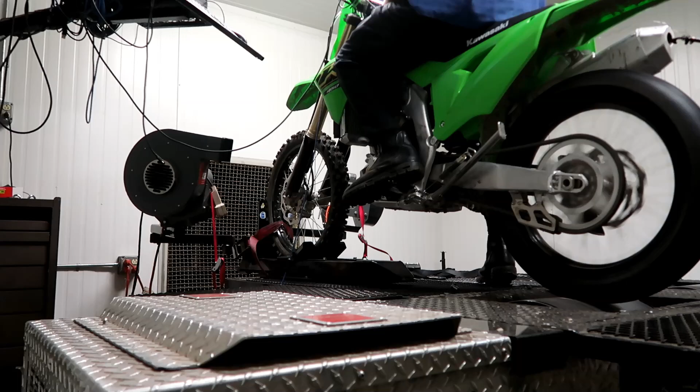Big question: is it detuned in comparison to the KX450?

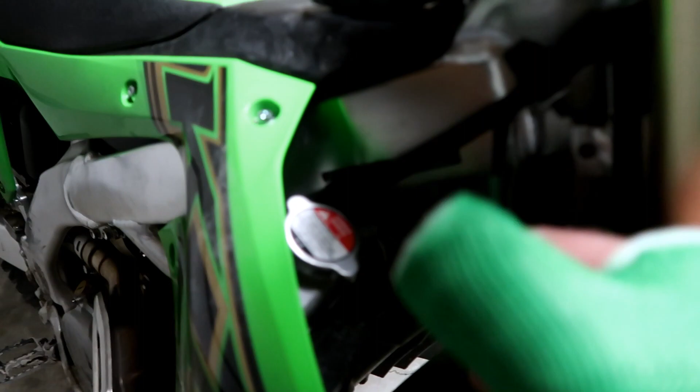As you saw in the title and thumbnail, we are putting this 2021 KX450X on the dyno. The bike is bone stock, as you can see. It has the stock exhaust, and we are running the black DFI coupler, as you can see right here.

So there's a couple reasons why I am putting the KX here on the dyno. One is because I want to get a good baseline for when I start to mod this thing. I want to be able to see if putting an aftermarket exhaust on will help out the power at all. And then 2, when the KX450X came out, people thought that the engine might be detuned compared to the regular KX450, and I kind of want to bust that myth there, see if it really is detuned at all. But apparently it is the same motor as the KX450, so when you look at it that way, there shouldn't be much of a difference. But then again, if there are any differences, it probably is in the tune.

So without further ado, let's go ahead and load up the bike, get to the shop, and get this thing on the dyno. Okay, we're on the way to the dyno. Curious to see what kind of power the KX makes here. Leave a comment down below and guess how much power you think it's gonna make. But I'll see you guys when we get to the shop.

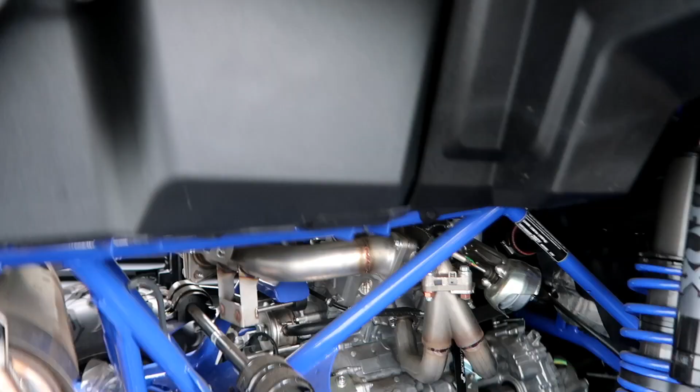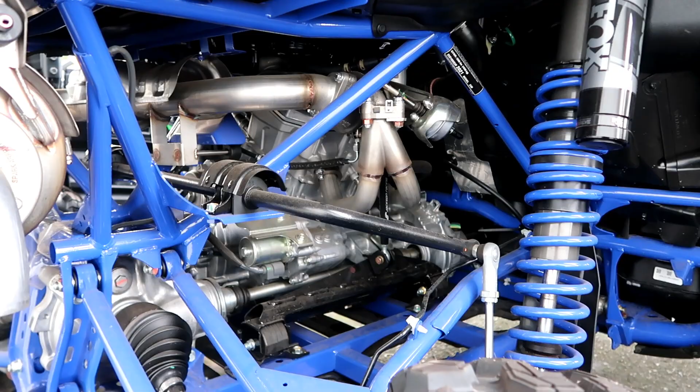Just finished here. KX is in the distance over there. But check out this Talon turbo over here. We have a Jackson Racing kit on it, as you can see here. And I think this one is for sale. I don't know if I'd go with a side-by-side. I think it'd be tough. I'd like to go with Kawasaki, but this Talon with the dual clutch, it would be fun versus the belt. You don't have to worry about the belt temps and whatnot, belt slip.

All right guys, we have made it back home from the dyno. And right behind me there, we have the numbers on the bike. One thing to note here, as you can see in the dyno runs, they had to put a street tire on the bike, which was kind of unexpected. Big chunk of change there just to change out the tire and get a baseline dyno at $130, but I guess, oh well, a knobby tire might not get a good reading on the dyno. But you see guys like Dirt Rider magazine and all that run the knobby on the dyno. Whatever, we got the numbers, but let's go ahead and see what we got.

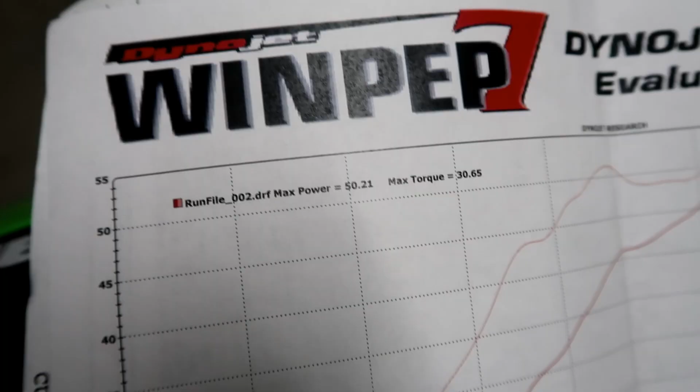All right, here we are. Max power 50.21 horsepower, max torque 30.65. For you guys out there, we are using SAE smoothing to a factor of 5.

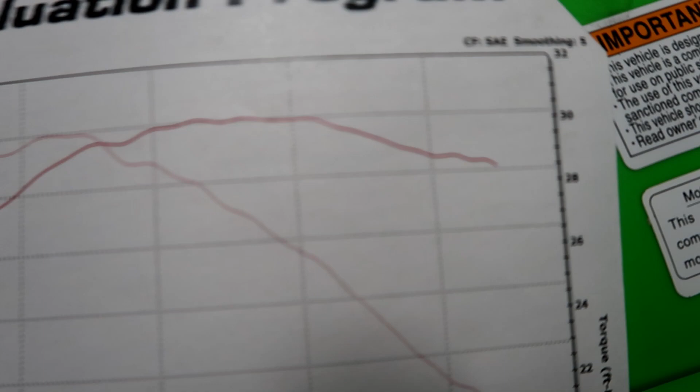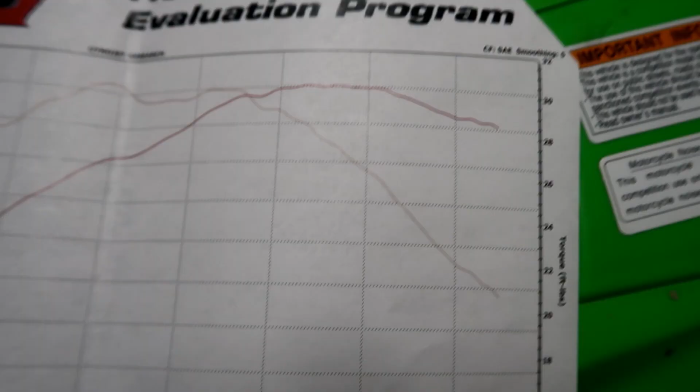So let's go ahead and look at the graph here. Max power appears to happen at about 10,000 RPM, which is great. I believe the rev limiter is somewhere around 11,500 or 12. As you can see here, the power really doesn't drop off that much after it hits its peak horsepower. Give you guys a good look at that.

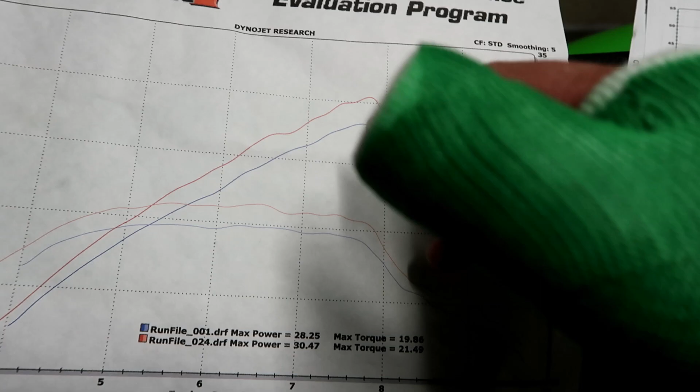In comparison, we have my built up KLX 351 graph here, and as you can see, it hits peak power and then it kind of drops off here. Although I will say that's probably due to a couple different things, which I'll save for another video. I think we need to be able to tune the ignition timing up top here so it doesn't drop off. That's what the dyno shop said, but in another video, we'll talk about that later.

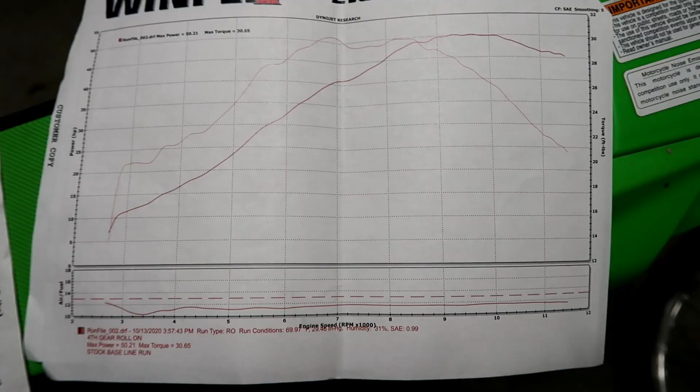But for comparison's sake, you can see the KLX, how much it drops off here, and then with the KX, it really just peaks and then kind of stays relatively flat for the scale that they're using here. It drops to maybe about 46, peak power is about 50, so that's all in all pretty good. You gotta love that 4-stroke power, doesn't drop off. Some 2-strokes from what I've seen, you know, they peak, of course, you're gonna feel that. That's why 2-strokes just feel so aggressive, but then you gotta keep on shifting, keeping it in the power band because they do drop off rather quickly up top.

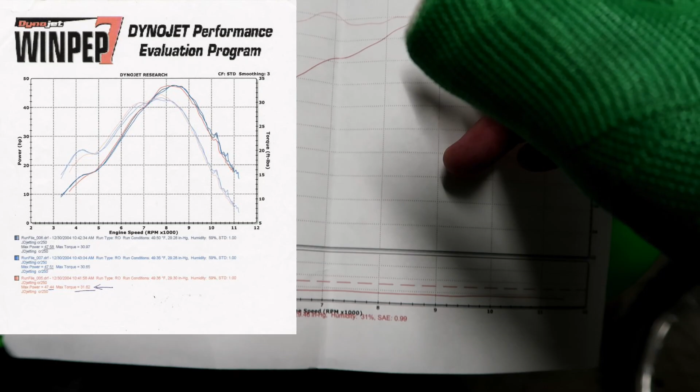So like I said, this is a stock baseline run. We did it in 4th gear.

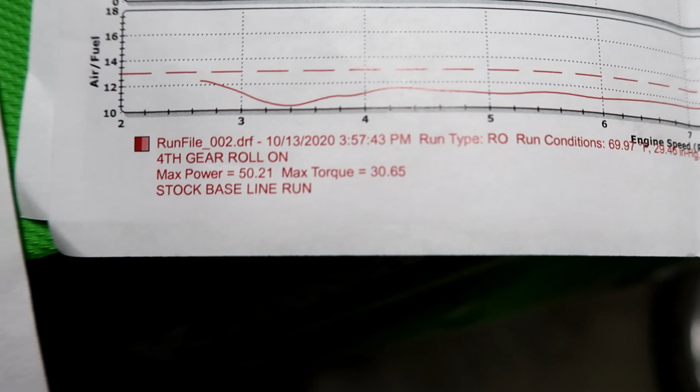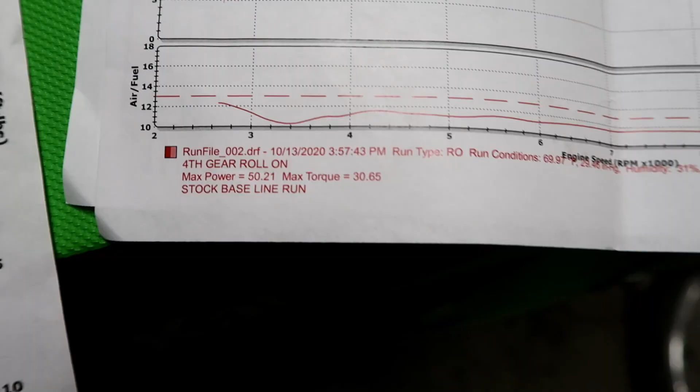Now let's talk about some of the other important things here. AFR, as you can see on the throttle tip-in, we go a little bit rich, probably down to around 10.5, something like that. So that's not too bad considering it is all stock, but wow, I see why these things aren't street legal from the factory.

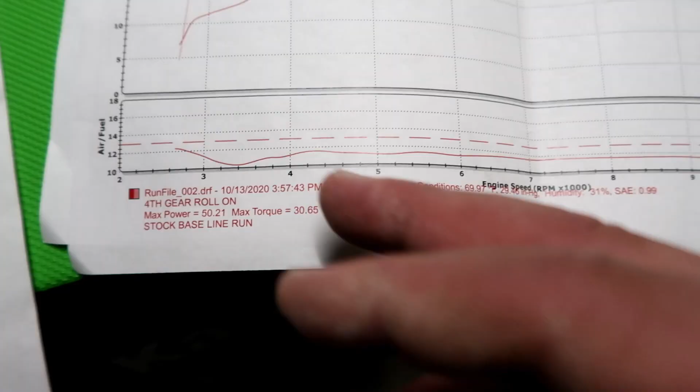Well, not necessarily why, but in comparison to a street bike, these things run really rich. Across the board, we're running about 11.5, I'd say, somewhere around there, and you can smell it when you start one of these things up. If you get to it at the dealer, it's running pretty rich.

So what does that tell me? Well, since it's running pretty rich, that tells me that if we put an aftermarket exhaust on here and open this thing up a little bit, pull that exhaust out of there, it's probably going to pick up some pretty good power just from an exhaust, not needing a tune.

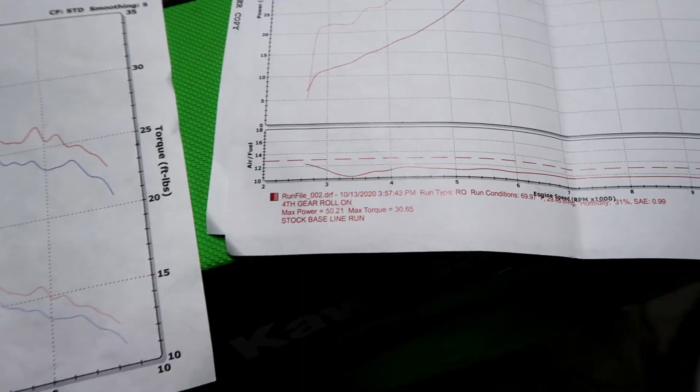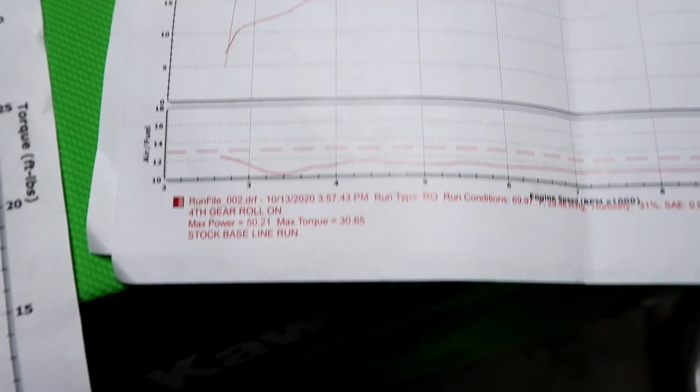Without going into too much detail, 14.7 to 1 air to fuel is where all the oxygen gets burnt up completely - there's none left over for either. But generally, when people are tuning, they try to stick around 13 to 1, depending on the application. Of course with cars it might be different, if you're boosted or naturally aspirated it's going to be different again. But 13 to 1 is kind of just an average, if you want to think about it like that, if you're new to this.

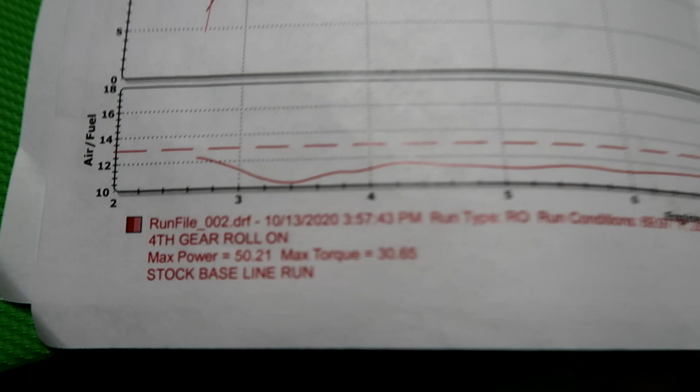For this bike, and knowing how MX bikes run, I'd probably run it a little bit richer than that - I'd shoot for around 12.5, a little bit below that 13 to 1 mark. So with an aftermarket exhaust, pulling some of that exhaust out of there more efficiently, we should pick up power pretty well. And that's great to see, because I bet if we slap an exhaust on there, we probably pick up a couple horsepower, maybe 52, 53.

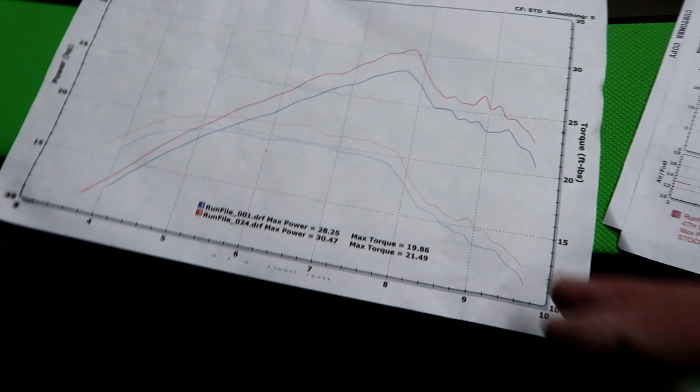You tune it, get that AFR dialed in, and we could very well get close to 60 wheel horsepower, which is absolutely insane on a dirt bike, especially coming from my souped up dual sport over here, which is making about 30 to 31.

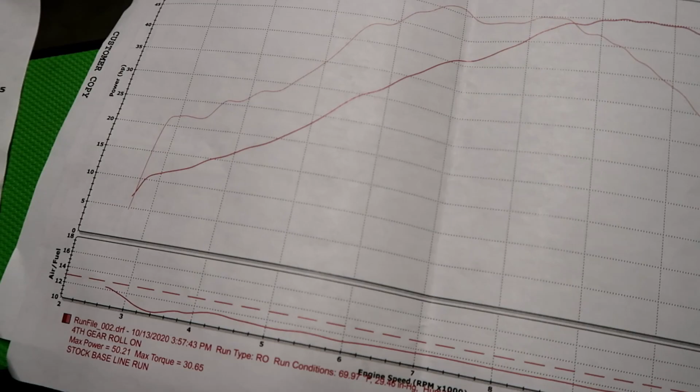We're running the red one, like I said in this video. 50.21 horsepower seems right about spot on with what the KX450s were making. I've seen numbers ranging from 51 horsepower all the way up to 55 horsepower stock. So there are a couple of factors that can affect that on the dyno.

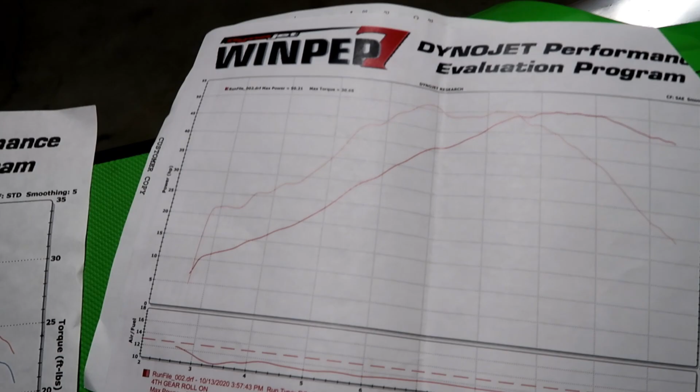The running conditions really don't affect it as much, but things like the tire pressure - they had to change to a street tire. And other people might be running knobby tires on the dyno. I'll go ahead and put the numbers up on the screen for you guys, where they talk about the numbers that other people have made - 51, I believe, 52, and then 55.

But overall, hey, I'm pretty happy with the numbers. At the end of the day, the numbers really do not matter. It all boils down to the rider, how you're going to put that power down, and honestly, just using the power in an effective way. So with that, I hope you guys enjoyed the video today.

Probably a little short dyno run video, but I think pretty informative for some of you guys who had questions about the motor of the KX450X, if it's any different than the KX450. But one thing's for sure, can't wait to get back on the bike and start ripping again.